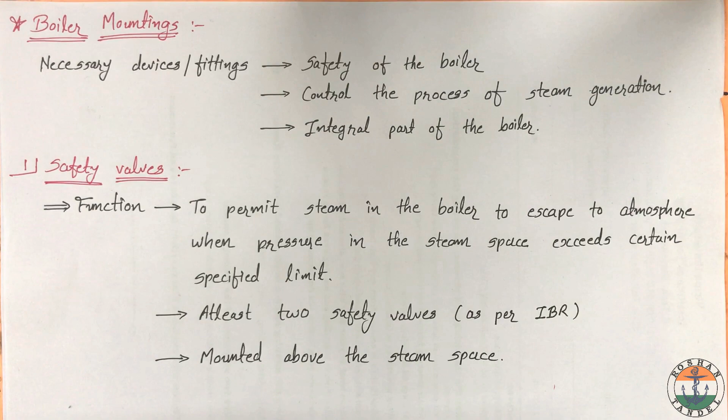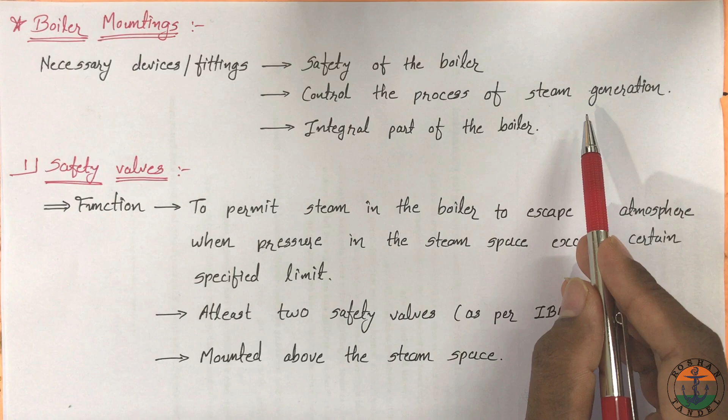Boiler mountings are the necessary devices or fittings installed for the safety of the boiler and to control the process of steam generation. These fittings are mounted on the main body of the boiler. They are an integral part of the boiler, and without mountings, the boiler cannot function.

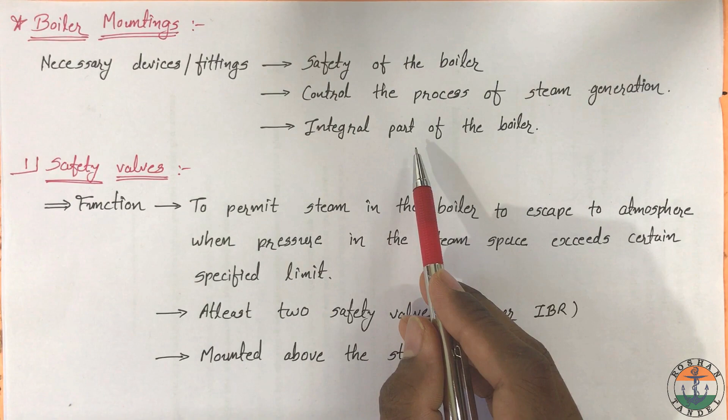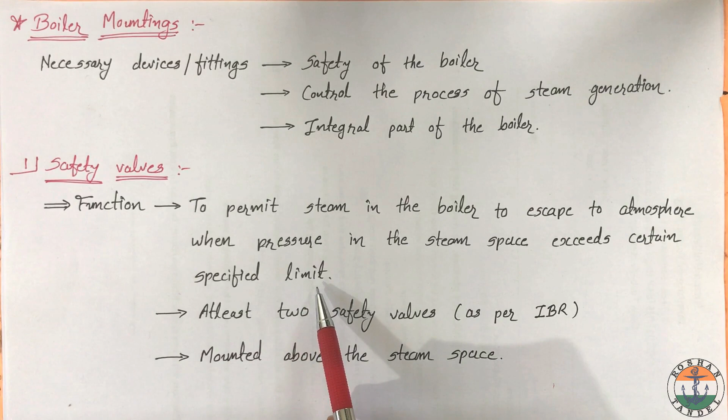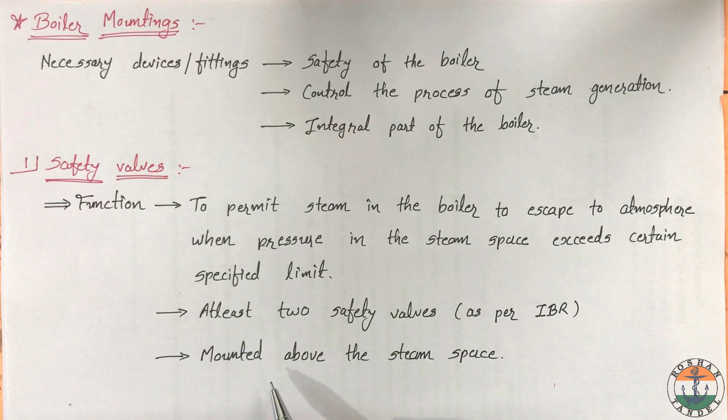First mounting is safety valves. Its function is to permit steam in the boiler to escape to the atmosphere when pressure in the steam space exceeds a certain specified limit. At least 2 safety valves have to be mounted on the boiler as per Indian boiler regulation. Safety valve is always mounted above the steam space.

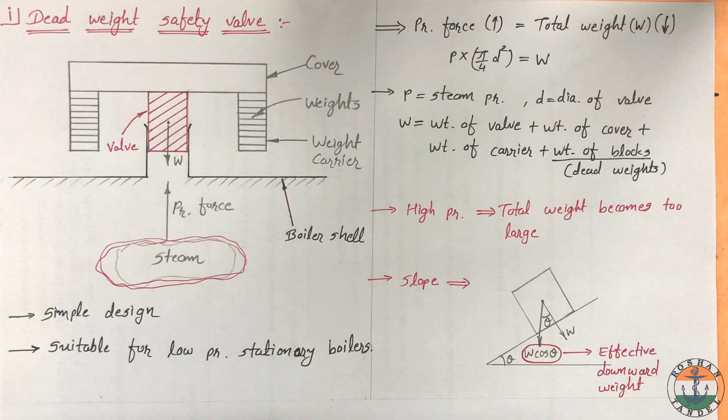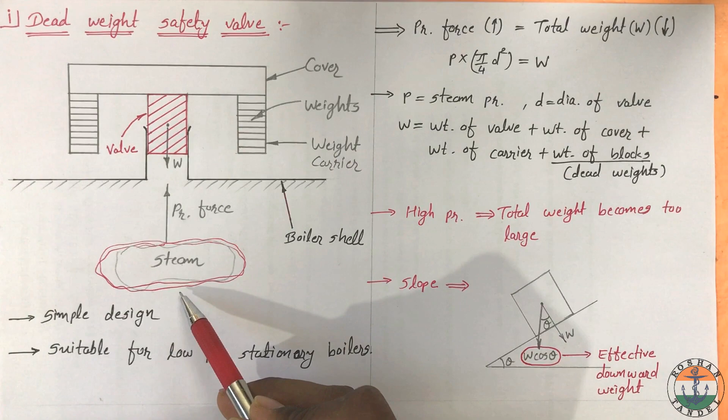Simple construction of dead weight safety valve is shown here. You can see its different parts: valve, cover, weights, weight carrier. Steam generated in the boiler is accumulated in the boiler shell, and at the top of the boiler shell, this safety valve is mounted.

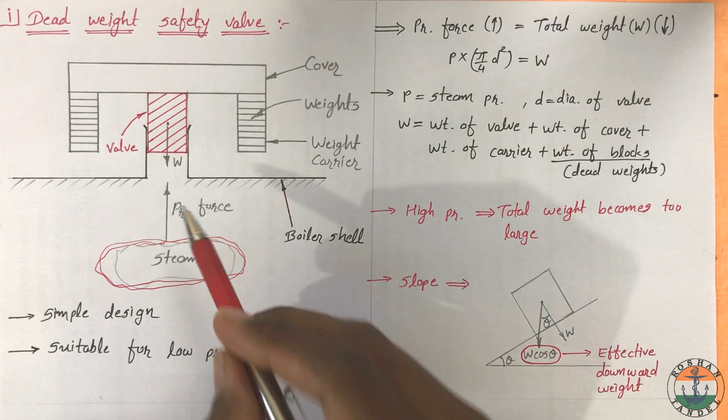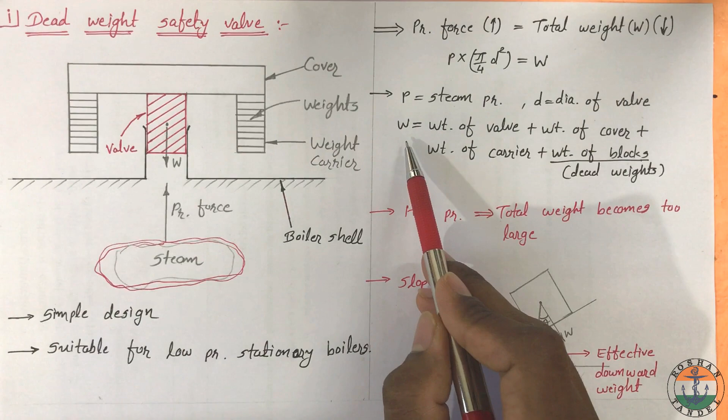Here, upward force exerted due to the pressure of the steam is balanced by the total downward force. Upward force is calculated by steam pressure into area of the valve. P is the steam pressure and D equal to diameter of valve. W is taken as total weight: weight of the valve plus weight of the cover plus weight of the carrier plus dead weights mounted on this weight carrier. There is a provision for putting dead weights to adjust working pressure according to the requirement. When pressure exceeds a certain specified limit, the valve along with the weight carrier is lifted and steam will be vented off.

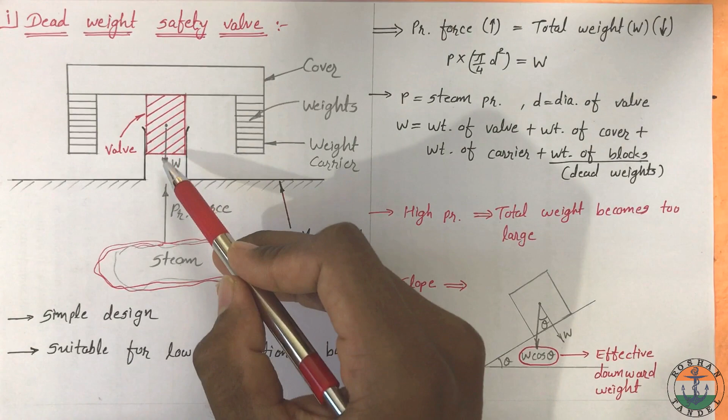The main advantage is its simple design. It is suitable for low pressure stationary boilers. For high pressure boilers, its weight becomes too large.

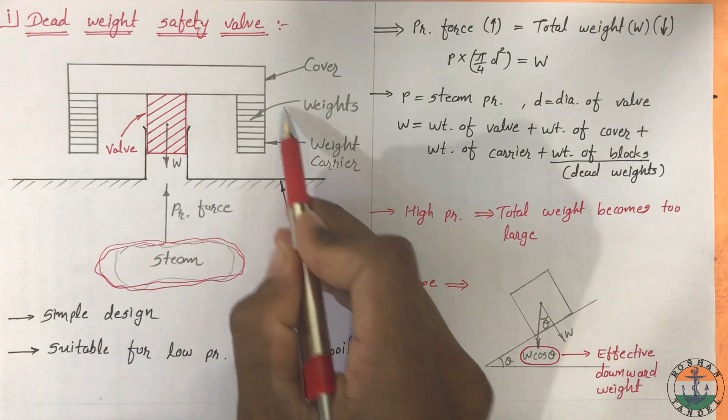In moving or portable boilers, there is a danger of weights being displaced. And also, there will be a reduction in effective downward weight when the unit negotiates a slope. Here, suppose the angle is theta, then total effective downward weight will be W cos theta instead of W.

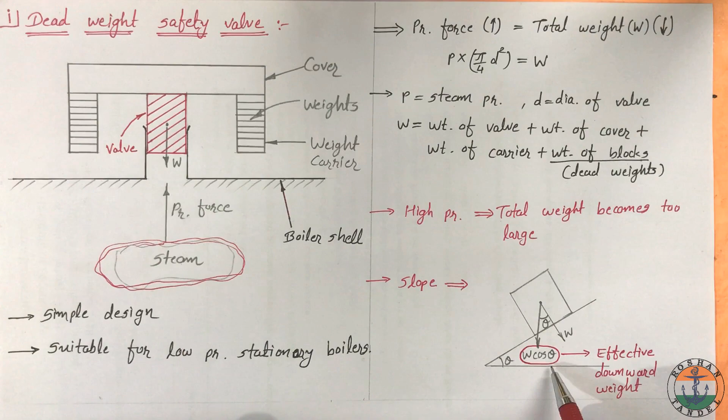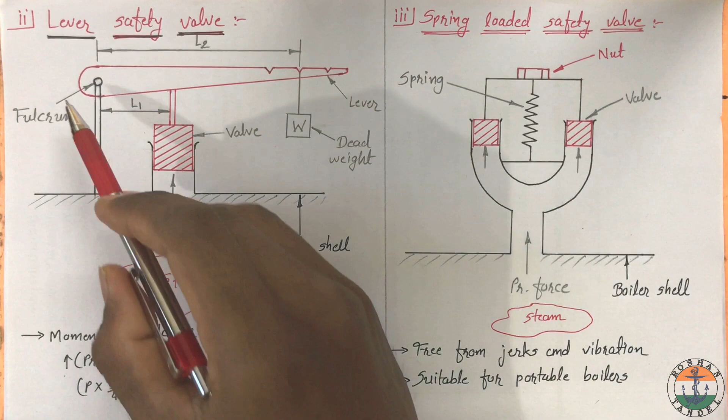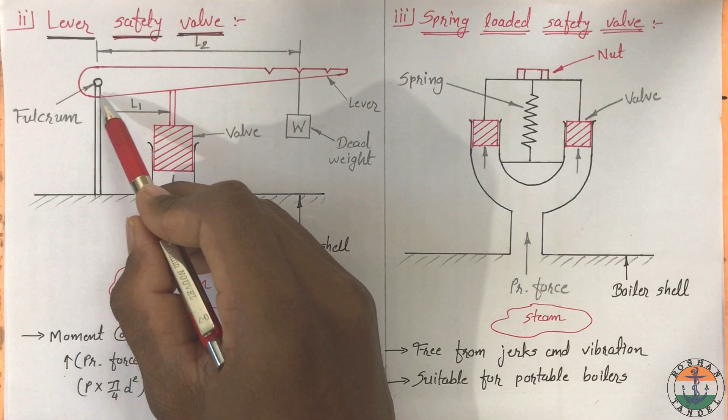Second safety valve is lever safety valve. Lever safety valve consists of a valve, fulcrum, lever and dead weight. Position of dead weight is adjusted on V-grooves provided on the lever. Here, moment about the fulcrum is balanced: upward pressure force due to steam into L1 equals downward weight into L2.

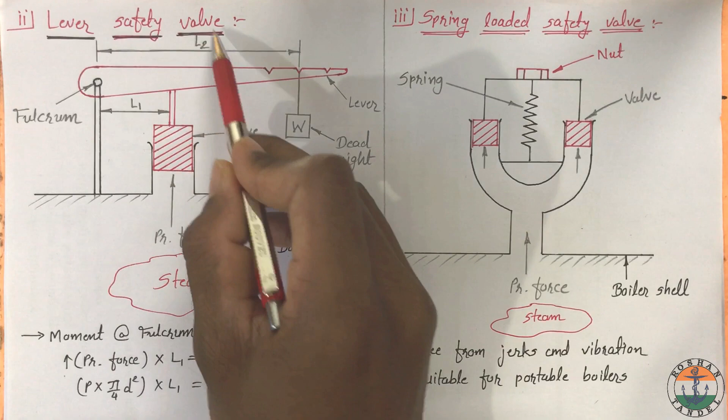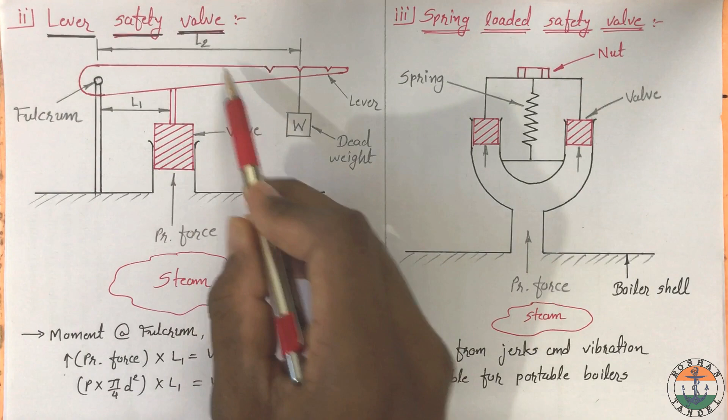Here, pressure force is taken as steam pressure into pi by 4 d square into L1, equal to W into L2. If you want to operate this lever safety valve with the same weight but for higher pressure, then you can shift this weight on the right hand side of the lever such that it can balance the pressure force. It is suitable for stationary boilers only.

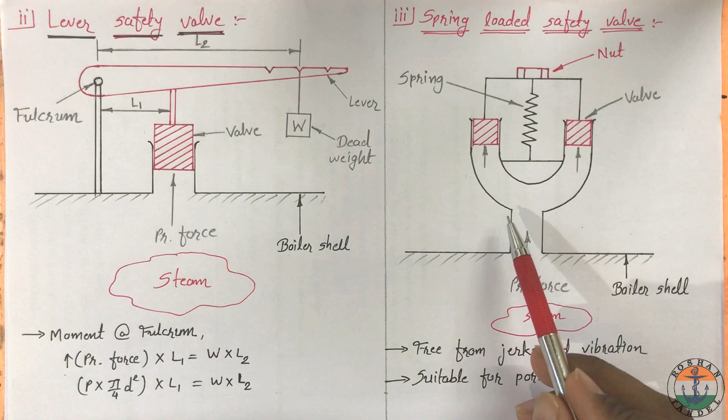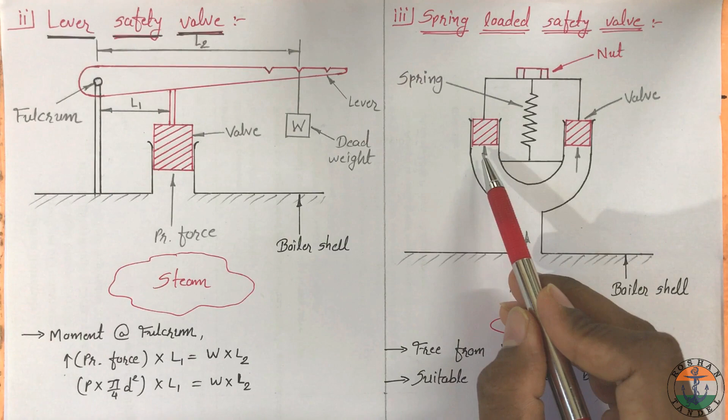Third type is spring loaded safety valve. This safety valve comes in different shapes. Here a U-type safety valve is shown. A nut type arrangement is used to control tension in the spring according to the pressure requirement. Spring force controls the opening of the valve against steam pressure. Spring loaded safety valve is best suitable for portable boilers such as locomotive and marine boilers because its operation is not affected by jerks and vibration.

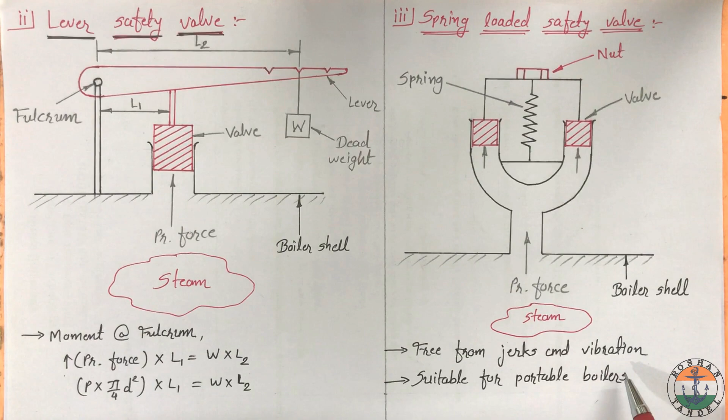Fourth is high steam, low water safety valve. It serves two purposes: first is to save the boiler against high pressure, and second is to safeguard the boiler in case of low water level. If the water level becomes too low, then overheating takes place and there will be softening of the furnace and other boiler components which can cause explosion.

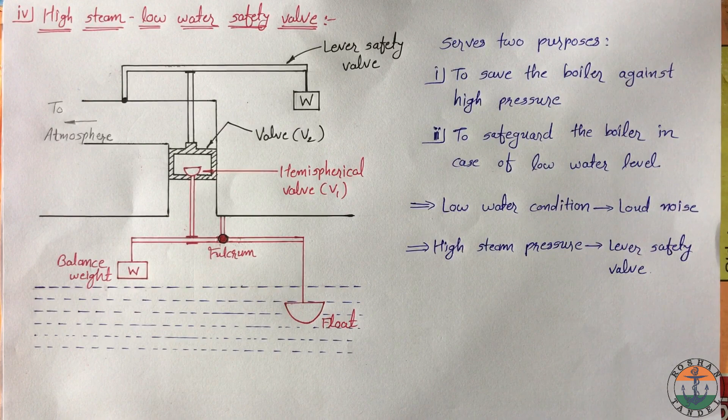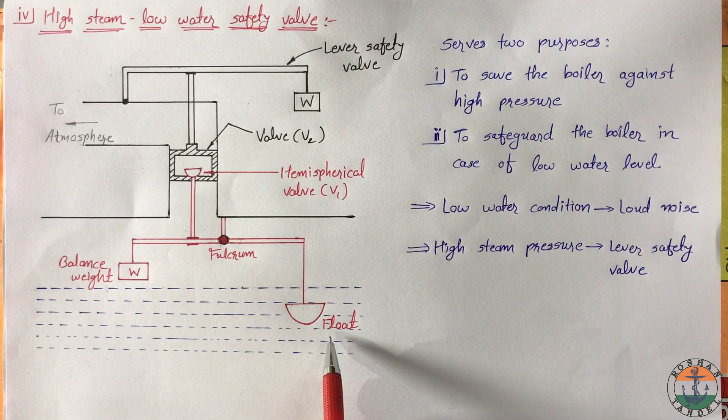Here consider one unit consisting of hemispherical valve V1, fulcrum, balance weight and float. Balance weight remains above the water level while float is submerged in the water. Weight of the float in the air is more than the balance weight. Buoyancy force acting on the float in the upward direction decreases its weight in the water and it will balance the counterweight under normal working condition. When water level goes below a certain level, the float no longer remains in water and its weight increases. At this time, the lever rotates in clockwise direction and hemispherical valve V1 is lifted. Steam rushes out from this section producing a loud noise which will serve as a warning to the boiler room.

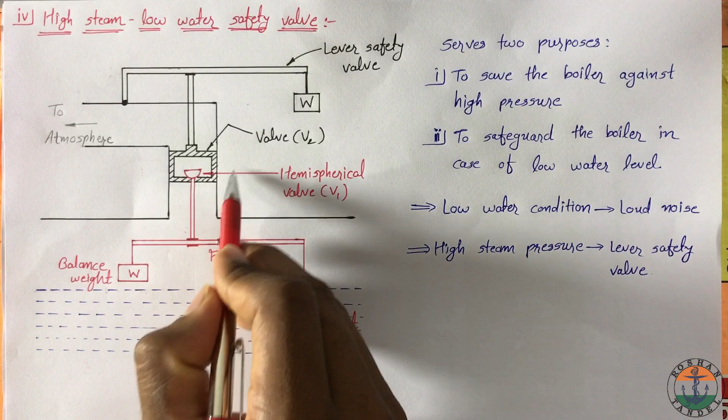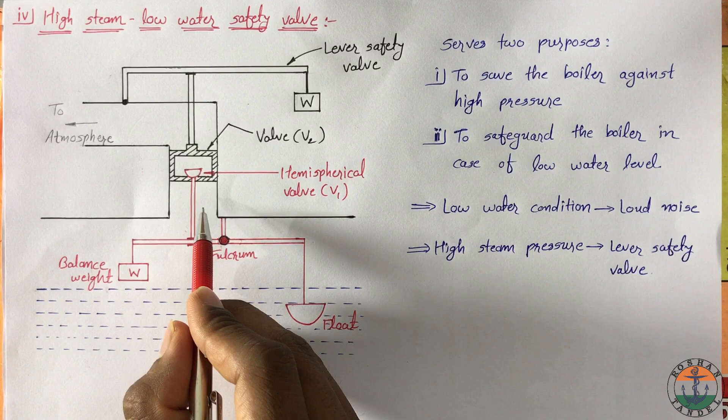Now consider second unit consisting of external valve V2 and lever safety valve. When pressure of the steam rises beyond the specific limit, the balance of the lever safety valve gets disturbed. This pressure force causes rise of both valves as a single unit, and this allows a free escape of steam to the atmosphere.